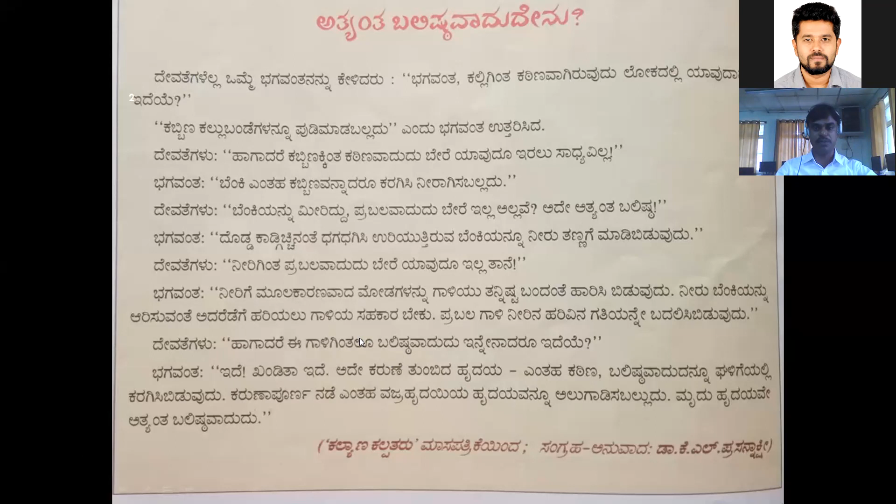For the benefit of students, I will say structure is an arrangement of load resisting elements. Giving a shape to a structure is nothing but structural design. Once we say structure, it has to satisfy some requirements—it may be a functional requirement or a structural requirement.

Structural requirement constitutes stability, which defines the state of equilibrium—the state to resist sliding and overturning. Strength is the capacity to carry loads. Safety is the margin that covers only the uncertainties.

Serviceability normally refers to deflections, which are the end product of loading, so deflection should be well within the limit. Sustainability and durability are more important—the satisfaction of functional and structural requirements throughout the utility period is very, very important.

For the safety of structure, we expect strength to be more than load. Any increase in load decreases the strength. That is why I consider delta S and delta L—plus indicates increase, minus indicates decrease. Variation of load is written as delta L, and variation of strength as delta S. Any increase in load decreases the strength, that is why I have written minus here.

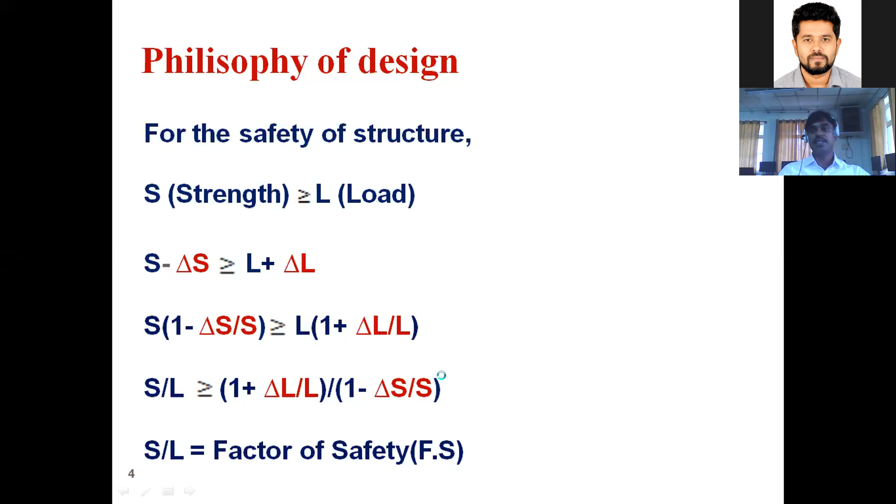Whenever we say height, it is related to buildings only. Whenever we say span, it is related to bridges only.

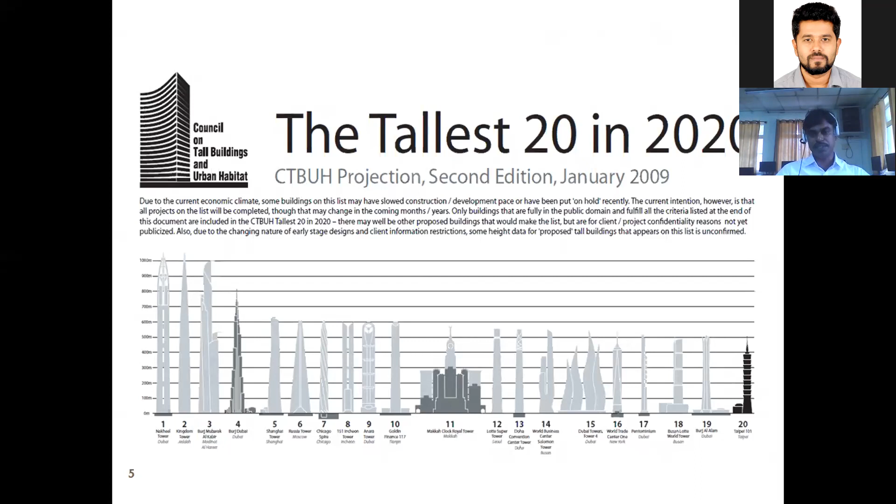There are some definitions when we say high-rise building. The building classification is like this in Indian context: if a building is up to 3 stories, we call it a low-rise building. 3 to 7 stories, we call it a medium-rise building. More than 7 stories, we call it a multi-story building.

According to Emporis standards, a multi-story structure between 35 to 100 meters tall, we call it a high-rise building. Building Code of India says a high-rise building is one with floors 15 meters or more in height, so we call it a high-rise building.

According to fire safety, as per International Conference on Fire Safety, we say there will be impact on height also, so that we have to consider.

According to Massachusetts law, the United States general laws, a high-rise is one having height higher than 70 feet, almost 21 meters. Buildings higher than 100 meters are termed skyscrapers. According to Emporis, buildings 300 meters or higher are termed super tall, and buildings more than 600 meters are termed mega tall.

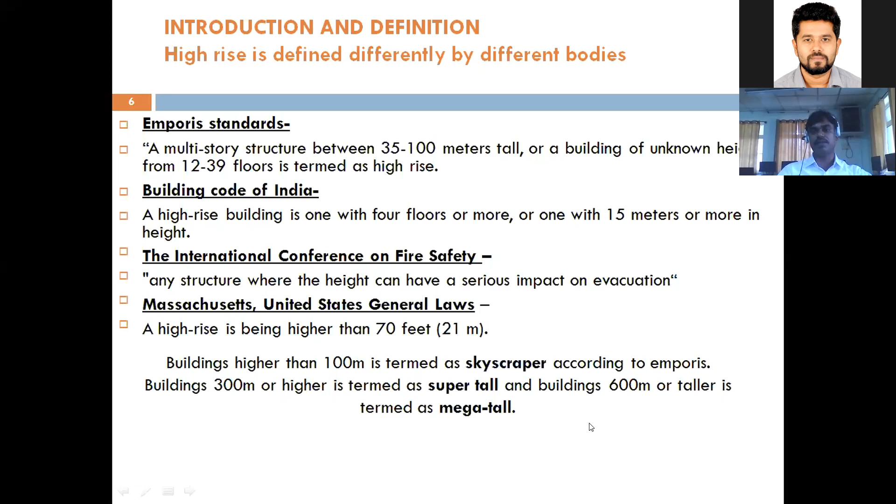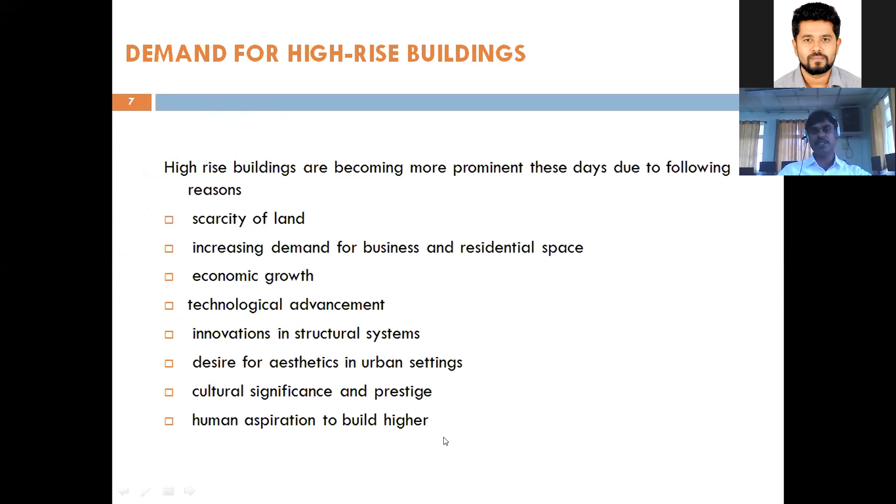So what demands actually push us to go for high-rise buildings? There are some demands. In some nations, there is a scarcity of land, an increasing demand for business and residential space, economic growth, technological advancement, innovations in structural systems, desire for aesthetics in urban settings, cultural significance and prestige, and human aspiration to build higher. These are the demands that drive us toward high-rise buildings.

There are some structural concerns when we talk about high-rise buildings. In reality, all high-rise buildings are subjected to various types of loads depending on their location. Normally these are the loads we expect for a building: snow load, wind load, impact load, blast load, earthquake load, in addition to dead and live loads.

In addition to that, because the buildings are too tall, the building sways due to lateral forces, and that becomes very critical. There's a greater demand on the girders and columns that make up the rigid frame system to carry lateral loads. So we need a rigid frame system to carry the entire load, because the action concerning earthquake load, gravity load, and wind load is somewhat different. So we have to learn a lot.

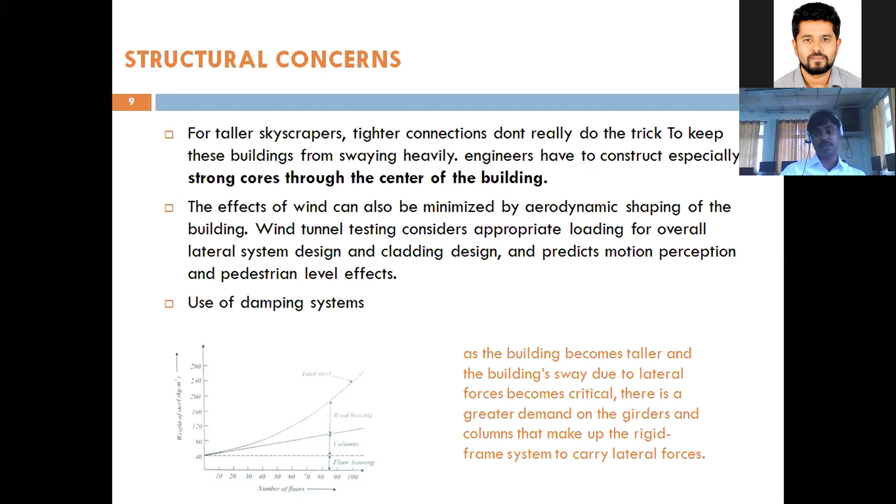There are some case studies we normally observe. If you see the Petronas Towers, it has a tube-in-tube structure. Such a system they adopted is tube-in-tube. The structural members are made with high-strength concrete. The perimeter columns are held together with the help of ring beams. The internal core structure is made up of concrete shear walls. The building did not require an extra damping system because of the heavy structural members made of concrete.

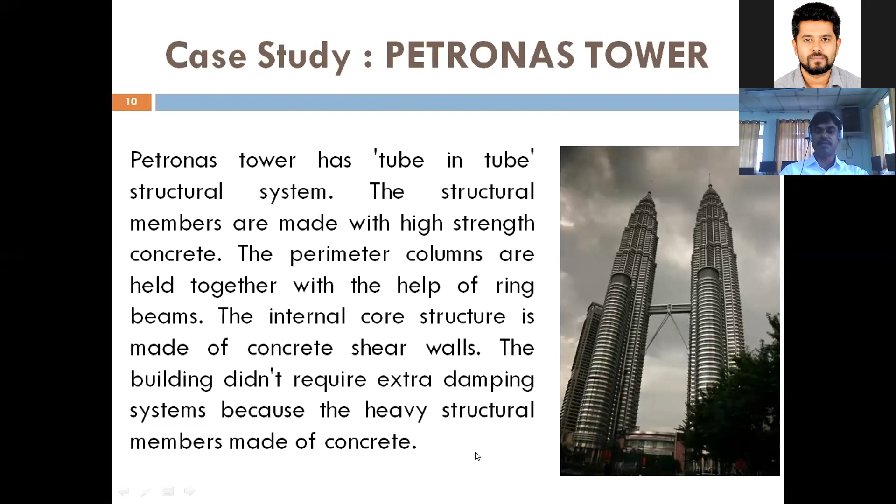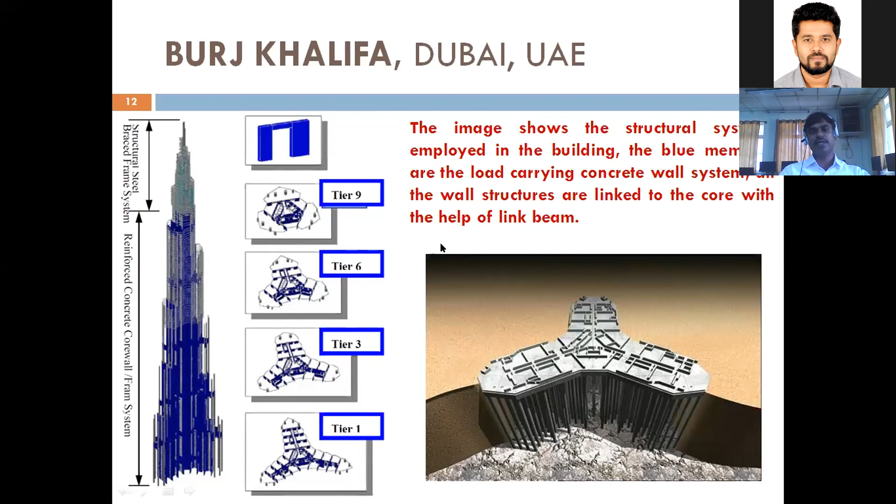There is one more construction building in Abu Dhabi, located nearby a beach. The client wanted to build a skyscraper of circular shape in Abu Dhabi. For that, he exercised a lot.

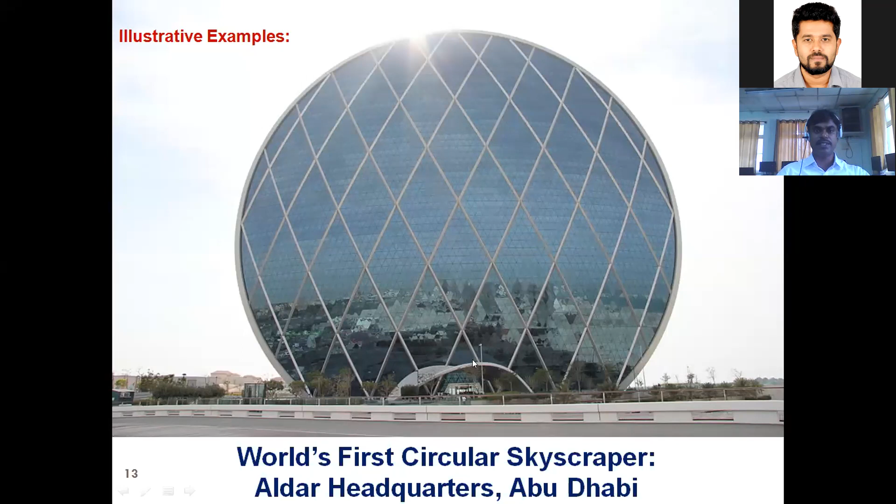This is regarding the world's first tall circular skyscraper, located in Abu Dhabi, called the Aldar Headquarters. This symbolizes the unity, stability, and rationality of the UAE. It took a lot of time to build.

You want to plan this building. The phenomena adopted to build a circular skyscraper in the vertical plane is this: if there's a person simply stretching his legs and a hand in this fashion, and if you join all these points, it becomes a pentagon.

The same idea they have adopted in building high-rise structures - the structural system they adopted is a pentagon type. It is actually the idea they have taken from this technique.

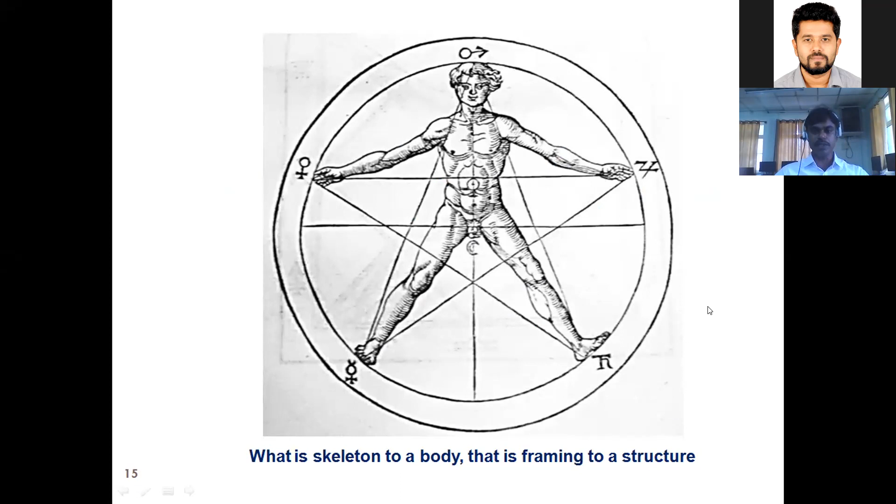There is a story behind Bahubali - not the story of Bahubali directed by Rajamouli, but this statue, this monument. There is one monument in Dharmasthala, which was given shape by an Iyengar in Karkala, and then they moved this statue and erected it in Dharmasthala in a hilly area. To do that, they brought a single monolithic stone. Mr. Iyengar gave shape to Bahubali. Once the Bahubali was ready, they had to travel from Karkala to Dharmasthala, almost 64 kilometers.

This person didn't use a single salt content in the preparation of food, because he would lose concentration. If you use salt content in the preparation of food, you will not get the concentration to do the work. That is why he did not use a single salt content throughout the completion of the work. Once they installed and erected it, only then did he use salt content in food preparation. That was the idea he got, and he completed the work.

Once it was ready, they moved it from Karkala to Dharmasthala, almost 64 kilometers, and the weight of that stone was 170 tons. While transporting that single monolithic stone, the statue of Bahubali, from Karkala to Dharmasthala, it had to cross many bridges, which were not designed for this 170 tons. So they provided additional support and then moved it. They hired a trolley with 64 wheels, driven by 3 tractors of 250 horsepower required.

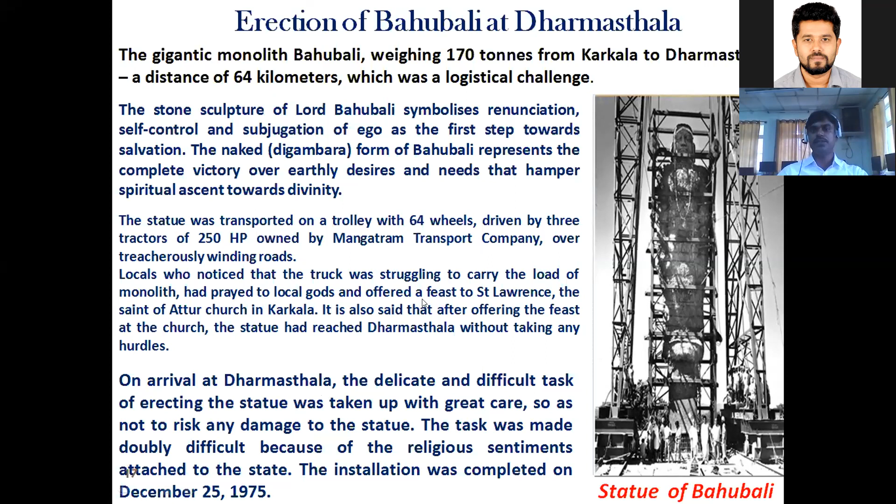So the technique - once they moved from Karkala to Dharmasthala, there were many bridges, and bridges are not designed for this type of loading, so they provided additional support and somehow moved it. Once they reached Dharmasthala, they had to take the statue to a hilly area, which is very difficult for moving a single stone. Somehow, with the help of many techniques, they reached the hilly area and dug a foundation. Once the foundation was ready, they had to make it straight with the help of a crane.

With the help of a crane, they lifted the statue, and they had to justify that the statue was vertically straight. How to justify this? This work was assigned to a professor, a former principal of NIT Surat, Basavarajaya. He read an anatomy book, in which it is very clear there's the ear portion and a knot here called the tarsals. He set a theodolite in front of the statue, and with the help of lifting, he bisected this ear portion as well as this other portion, ensuring the line of action and cross section of both lie in one plane. Only then can we say the statue is justified, standing in the right manner.

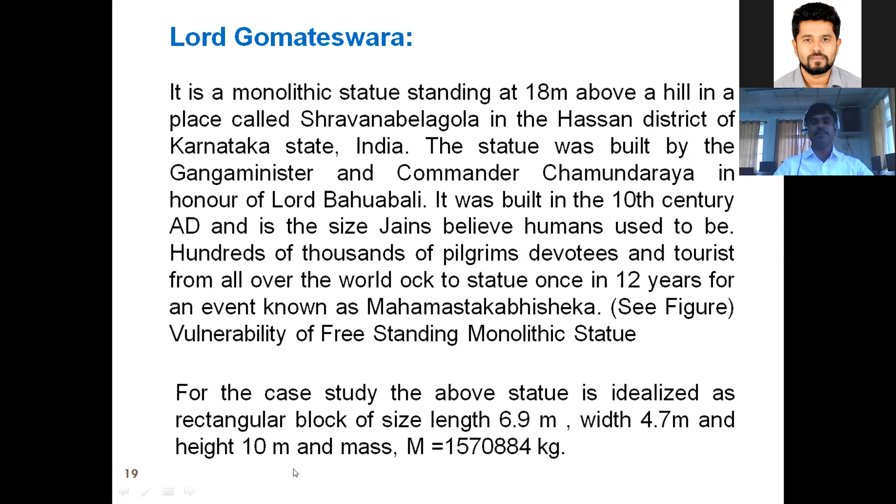I told you regarding Lord Gomateshwara, we also call him Gomateshwara. There is one more Bahubali statue, which we can find in Shravanabelagola. Some similar studies were carried out by Pradeep Kumar Ramacharla of IIIT Hyderabad. This statue is actually 18 meters high, standing at 80 meters elevation in a hilly area. The size is a rectangular block with length 6.9 meters and width 4.7 meters, and the height is 10 meters. The mass of this is almost this much.

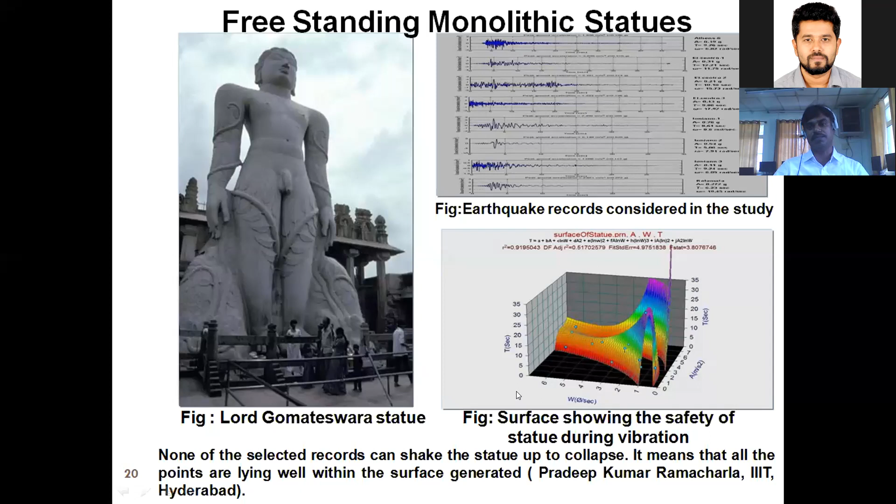It is very interesting for a structural engineer or civil engineer to know loads and forces on buildings, because that is the first qualification. You have to have the idea of loads, and only then can we design or analyze an inspiring structure. The statics of a building deals with its structural stability according to Newton's first law.

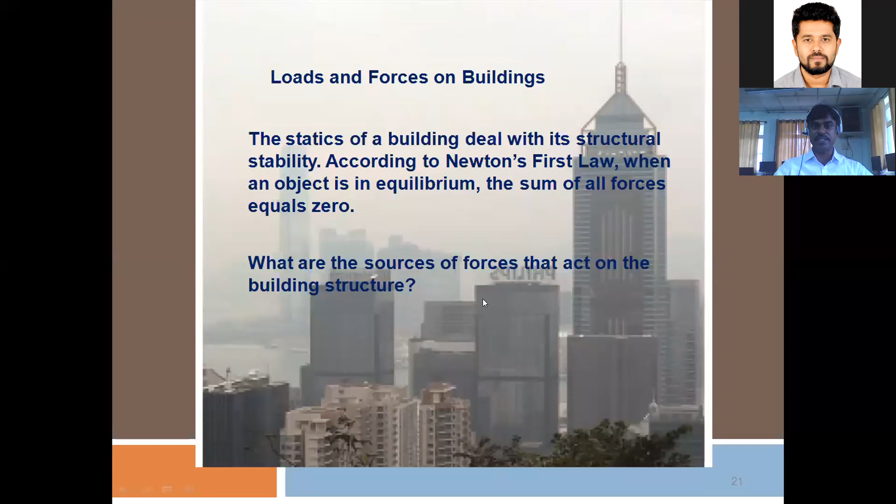When an object is in equilibrium, the sum of all forces equals zero. What are the sources of forces that act on the building structure? These are the various loads: gravity loads, dead loads, live loads, snow loads, lateral loads, wind loads, seismic loads, specific load cases, impact loads, and blast loads.

If you take an example, a tree, wherever you go - India, USA, Pakistan, or any country - the stem of a tree remains circular in section. It grows in a circular manner.

What dictates a tree to grow in a circular fashion? The wind dictates it. When wind hits a tree, it has to take a path, and that is why wind dictates a tree to grow in a circular manner. But the phenomena of earthquake design for a building is different than that of wind load. Earthquake load is an inertia force, so we will see the differences here.

I will discuss loads and load forces. All loads are forces, but all forces are not loads. When a force is acting externally, it is called a load.

Dead load refers to loads that have fixed magnitude and position. Live load refers to loads whose magnitude and position is not fixed. Wind is air in motion. Earth pressure is not much of a problem as compared to dead load and live load. Snow load in Himalayan regions is also not much of a problem. Water pressure is considered mainly in dams.

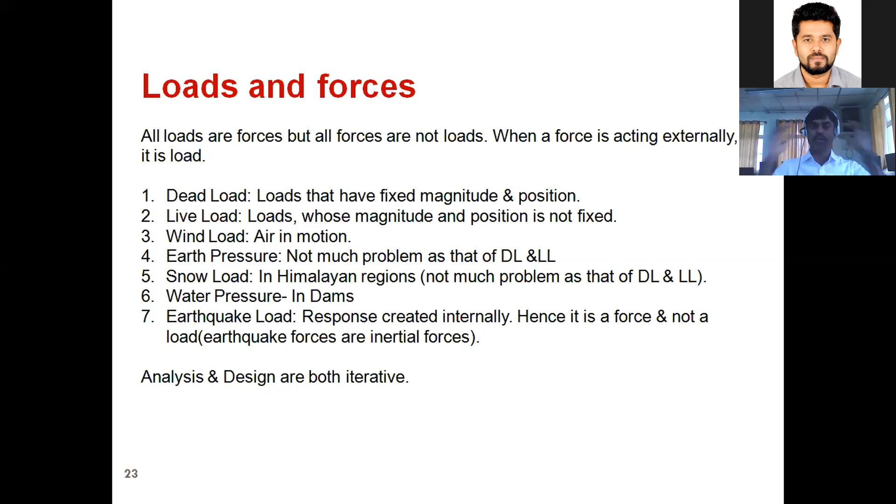Earthquake load is a response usually created internally, hence it is a force, not a load. We make it a load by adopting a code of provisions, which is why the analysis and design are both iterative.

If you compare earthquake load and wind load, wind is actually a pressure type of loading, whereas earthquake load is an inertia force. It is something like you are in a bus without a seat to sit on.

The driver is going at a speed of say 160 or 180 km/h. If the driver suddenly applies the brake, your feet move along with your leg, whereas your upper portion will be thrown back. In the same manner, when a building is subjected to an earthquake load, the base moves along with the acceleration, but the upper portion will be thrown back. That is why it is an inertia force.

Whereas wind load is a pressure type of loading, which is uniform. As the height of the building increases, the wind pressure also increases.

But in case of earthquake load, ductility is more important. So in case of wind load, stiffness plays an important role, whereas for earthquake load, ductility plays an important role.

Apart from ductility and stiffness, damages are also important. In case of wind, if a building has damage, that damage is not at all allowed for a wind case. But in case of earthquake load, damage may be allowed, but ductility plays an important role. Damage consideration becomes very important when you consider a high-rise building.

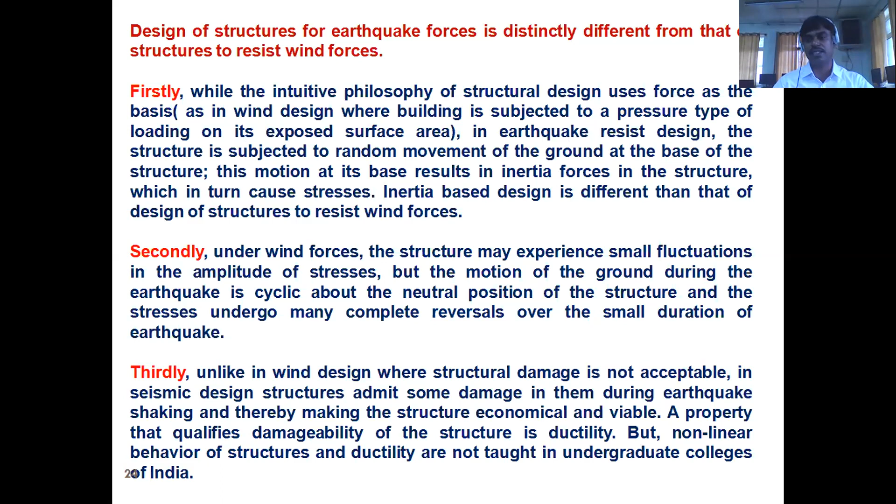So basically wind is a pressure type loading, earthquake load is an inertia type of loading on a building. Both are cyclic in nature, so we call it dynamic load. When the wind is in action, the response is somewhat different than when the earthquake load is in action.

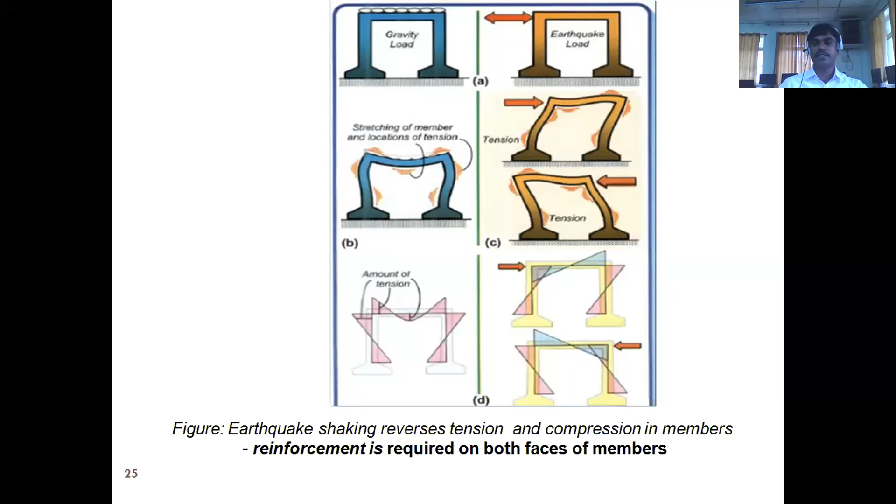That is why, as per seismic design philosophy, as per code of practice, this has been revised now, 2016. Strength and ductility are the main two attributes of a structure to resist earthquake forces efficiently, particularly in severe seismic zones. Two requirements are necessary for a structure designed as per earthquake practice: firstly, strength for which a structure will be designed, and secondly, ductility, which is more important.

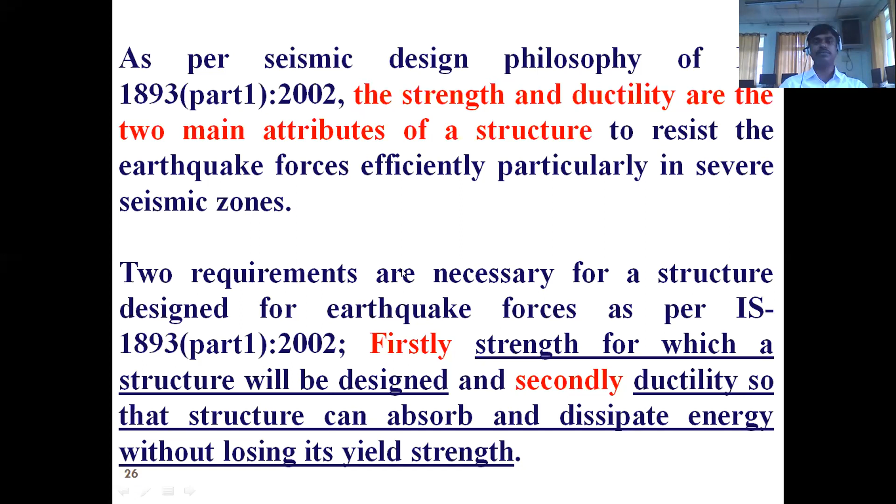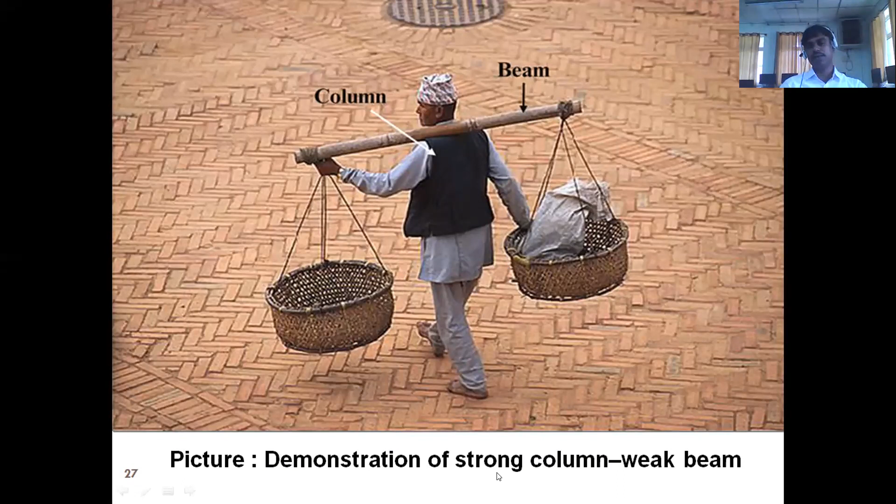That is why in case of earthquake load, we go for strong column and weak beam. So there are some important modifications in code of practice. We consider two levels of earthquake: design basis earthquake and maximum considered earthquake.

An earthquake that can reasonably be expected to occur once during the design life of a structure, we call it design basis earthquake. The most severe earthquake effects considered by the standard, we call it maximum considered earthquake. We have to consider this and design for that.

There are three seismic hazard levels: serviceability earthquake, design basis earthquake, and maximum considered earthquake. In case of serviceability earthquake, there will be a 50% probability of exceedance in 50 years. Return period may be 100 years.

In case of design basis earthquake, there is a 10% probability of exceedance in 50 years, and the return period may be 500 years. In the maximum considered earthquake, there will be a probability of 2% of exceedance in 50 years, and the return period we consider as 2,500 years.

That is why in code of practice, zone factor corresponds to this maximum considered earthquake. The values of Z are evaluated in a deterministic way. It cannot be directly related to the definition we said above. The factor 2 in the denominator of Z is used to reduce the MCE, maximum considered earthquake zone factor, to the factor for DBE, design basis earthquake.

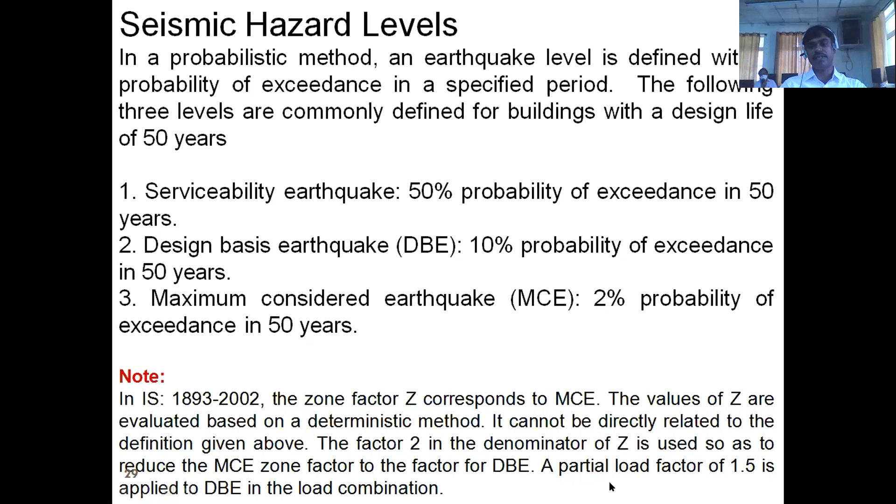So the partial factor, load factor, we have to consider for DBE in the load combination. So the risk can be defined in this fashion.

Risk is always a product of hazard, site effects, and vulnerability. Vulnerability is nothing but analysis of a structure when it is subjected to a hazard, maybe in terms of interstory drifts, stresses, and strains. But risk is nothing but the probability of damages and losses, whereas vulnerability depends on building type.

I told you the analysis in terms of many parameters. It depends on building type and age, population density, land use, and month and time. But soil effects play an important role, so soil amplification is due to soil type and topography.

Whereas the hazard is nothing but the probability of ground motion. This can be estimated, but the hazard cannot be mitigated.

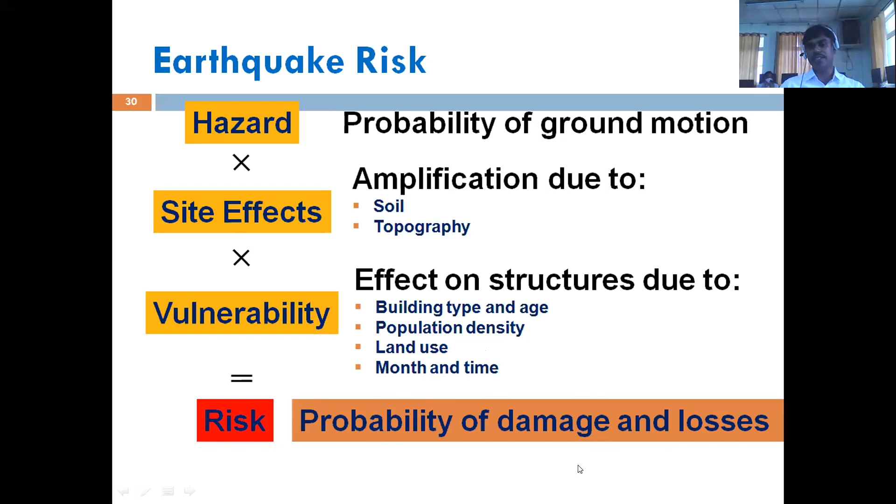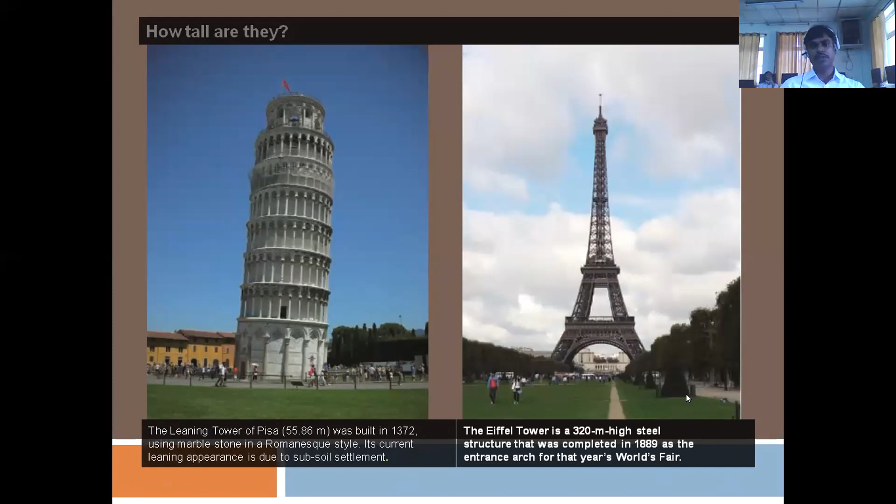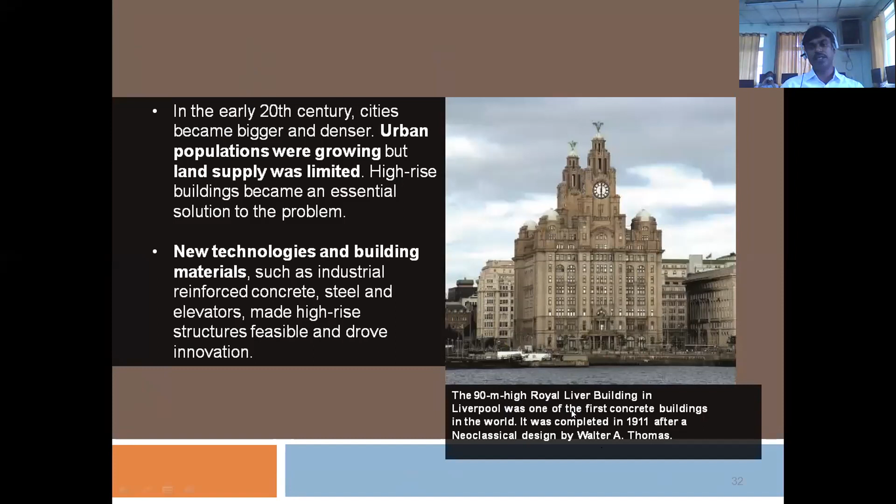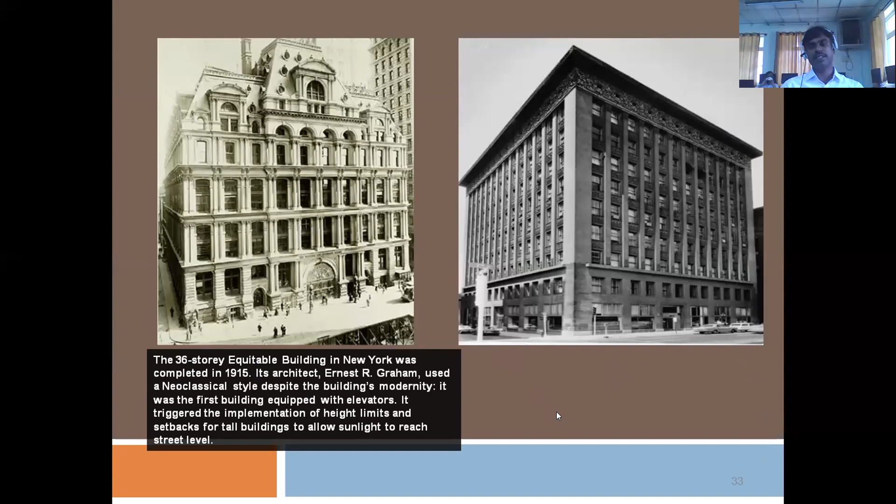So this is one more high-rise building from the early 20th century - it is actually the Royal Liver Building in Liverpool. And there are some other buildings which were built earlier: a 30-story building, a 36-story building, and this is one more building.

So now our interest - do you know these buildings? How tall are they? What are the structures? That is very interesting. So in the future, what may be the height of a building?

That is more interesting for a structural engineer. Whenever we say skyscraper, high-rise, mega tall, super tall, anything, what sort of section is required? Whether we go for a prismatic section, a tapering section, or a varying cross section. Whatever the high-rise building you see in Abu Dhabi or any nation, either they build prismatic type, tapering type, or varying cross section.

If you consider the council, it is officially used to describe if the height is more than 600 meters, or double the height of a supertall, because Burj Khalifa is almost 828 meters. So our interest is to know what parameters are important to build such a high-rise building. So I will take up first the prismatic section.

And then I will take up the tapering section, and last the varying cross section. Our interest is to know, because I told you for the safety of such a structure, we expect more than that load. Generally it is fine. So if the load is more, the strength becomes weak. So strength is more important.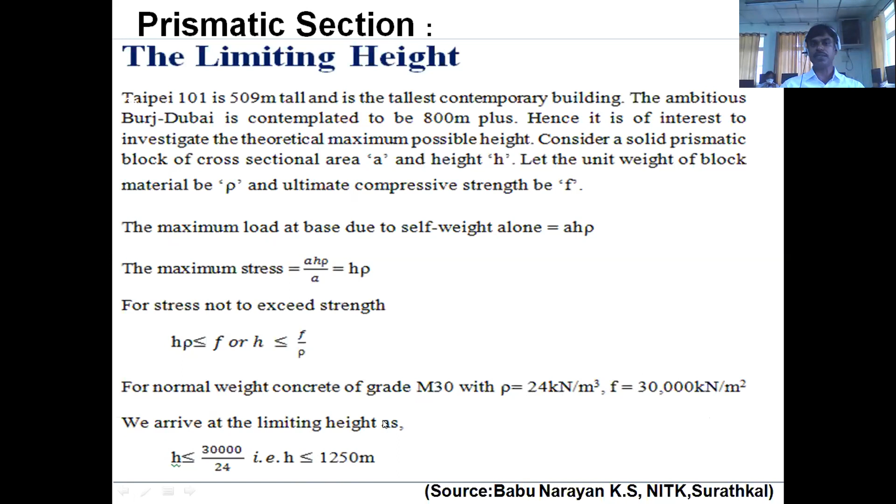If you consider a tapering section, even if the block in question were to be tapering, with area A at the bottom, vanishing to 0 at the top, load usually is 1/3 of H into rho, volume into density. Stress again divided by area is 1/3 into H into rho. For this stress not to exceed strength, 1/3 H into rho should be less than strength. If you adopt the same grade of concrete, you can go up to a height of 3750 meters. Still more, if you are going for a tapering section, we can build a high-rise building up to a height of 3750 meters. What dictates this?

Actually, if you see here, it can be recognized that the maximum achievable height is restricted by the material's strength to weight ratio. To extend the possibility, we need to seek materials with high specific strength to weight ratio. Also, it should be remembered that this limiting height is arrived at for self-weight alone, and if we include some other loads and effects, which are drastically less compared to it.

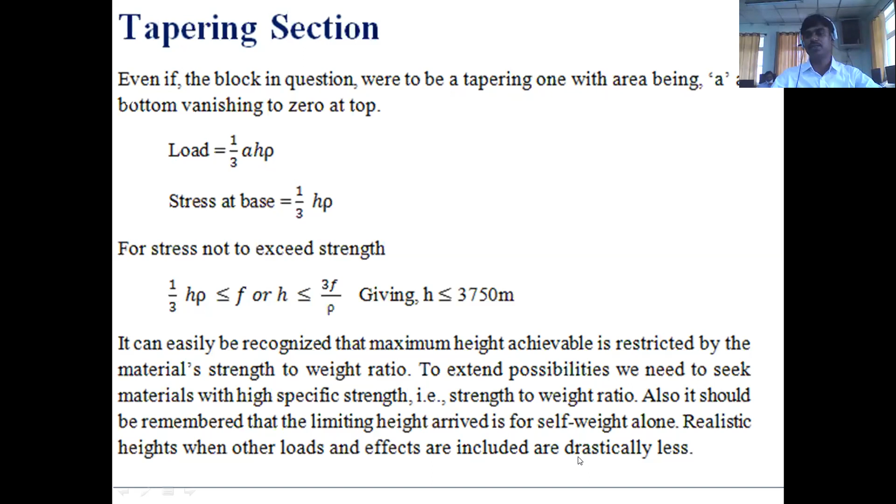Suppose if you consider a varying cross section - some area here, this is the cross section with varying cross section, some area at top and some area at the bottom. Let the cross-sectional area at the top be small a, and at a distance x from the top be A. Say here, from here the bottom is A. The figure shows the forces acting on the slice of thickness dx. I'll consider a small element here, some area, small element, and where is the W?

W is nothing but density, and sigma is the uniform stress. If a varying cross section is subjected to uniform stress, and if you equate these forces acting on an element here, the dA indicates change in area, change in cross section. That's all. So the force is vertically down here. It offers a resistance, that is sigma into A plus dA. This is for an element.

So if you equate all these forces, sigma into A plus dA minus sigma A should be equal to the total load coming, which is W into A into dx. If you separate these variables, this gets cancelled: dA by A should be equal to W into dx by sigma. W is nothing but density here.

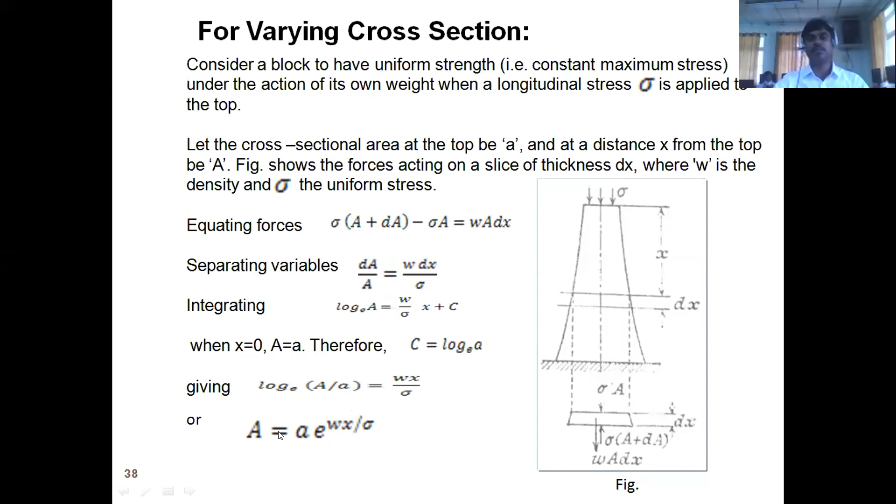Sigma is nothing but uniform stress. If you integrate this expression, it becomes log base E, so log A equal to W divided by sigma into X plus C. When X equal to 0, A is small a. If you put C equal to log A base E, you get this expression: A equals small a times e to the power of Wx divided by sigma, where W is density and sigma is stress. This is the top cross section area, this is the bottom cross section. This is the expression we are taking.

So similarly, our interest is to know that of height also. What will be the span? Because bridges are continuous on many supports, bridges are designed as a continuous beam. It continues on many supports, like a simply supported beam.

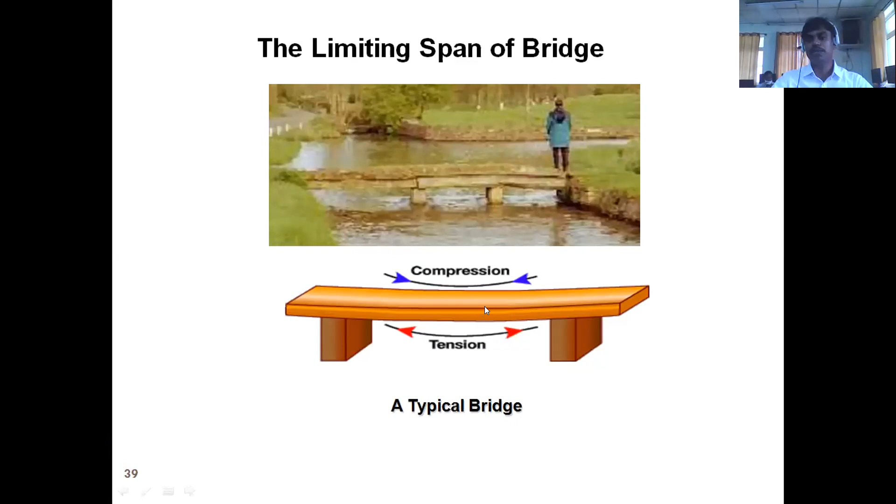If a lady is standing on a man-made bridge, what do you expect? Compression at the top, you can expect tension at the bottom. The behavior is like this.

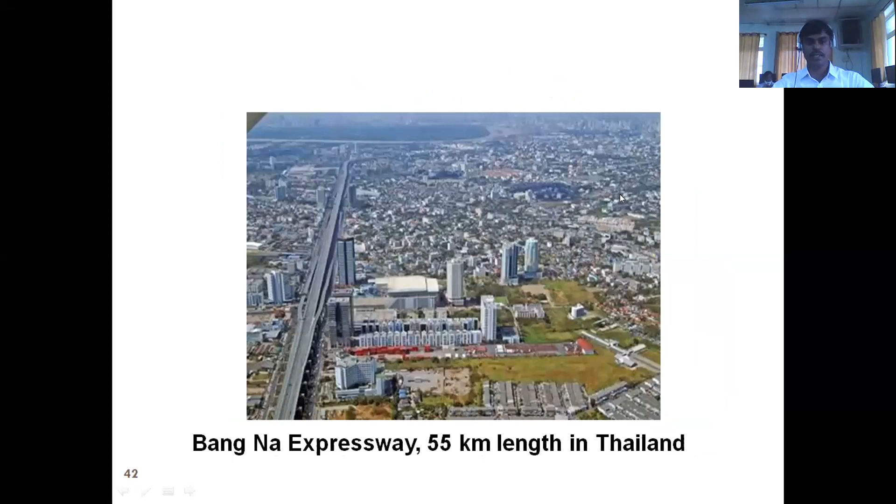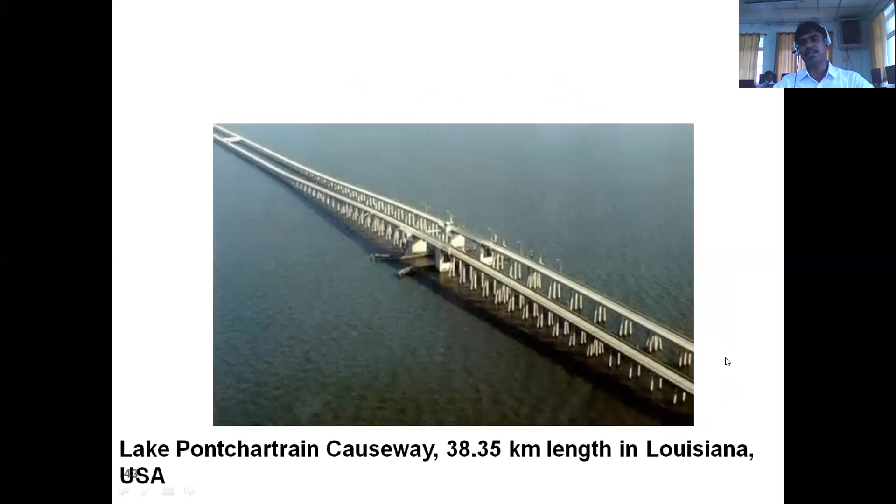So these are some of the longest bridges in the world which we come across. There is one that is actually 164.8 kilometers in length in China. There is one more bridge in China that is 113.7 kilometers in length, that is the Tianjin Grand Bridge. Then Bang Na Expressway, 55 kilometers in length in Thailand. And one more in Louisiana, almost 38.35 kilometers in length. In Louisiana there is one more bridge which is 36.69 kilometers in length.

So what is important to build a bridge of this span? What may be the limiting span? Our interest is to know what may be the limiting span. Let us attempt to determine the theoretical maximum span. Consider a simply supported beam carrying its own weight. Let L be the span, and let B and D be the width and depth of the beam. Let rho, F and tau be the unit weight of the material, ultimate bending strength, and shear strength respectively. And let delta max be the maximum permissible deflection of the beam.

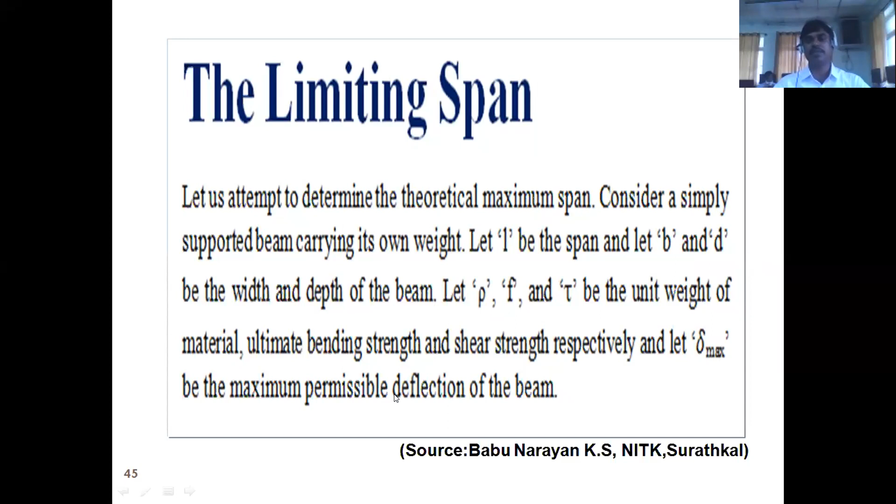Once we say simply supported beam, the structural behavior we can expect is that deflection will be more, there will be shear. So based on all these considerations, first we will consider structural consideration.

For structural stresses to be less than maximum permissible strength: load per meter is BD into rho into density. Maximum moment for a simply supported beam is BD rho into L square, that is WL square by 8. BD into rho is nothing but load, and WL square by 8 is the maximum bending moment of a simply supported beam. Section modulus Z equals BD square by 6 for a rectangular cross section. Maximum bending stress can be expressed as M by Z. Substituting for M and Z, you arrive at 3 by 4 rho L square divided by D.

This is the bending stress due to loading, due to dead load alone. This stress should be less than the maximum strength, so I have to write this should be less than the maximum strength. If you rearrange this, you get the expression L should be less than or equal to root of 4F divided by 3 into rho into D. Here, L is the span, D is the depth of the section. L is directly proportional to the depth. What does it indicate? The equation suggests any span is possible with the right depth. That is what we got from flexural consideration.

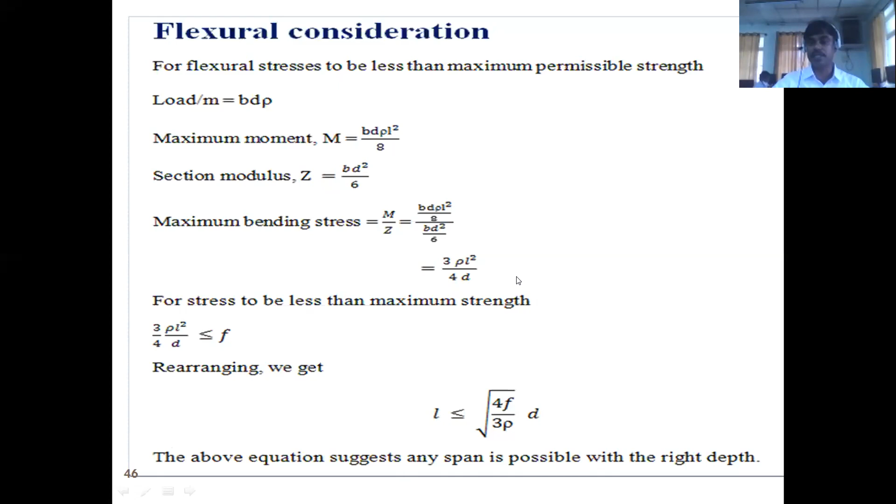What does it indicate? Again, L is directly proportional to D. This expression again suggests that any span can be managed provided the depth is right. That is what the indication is.

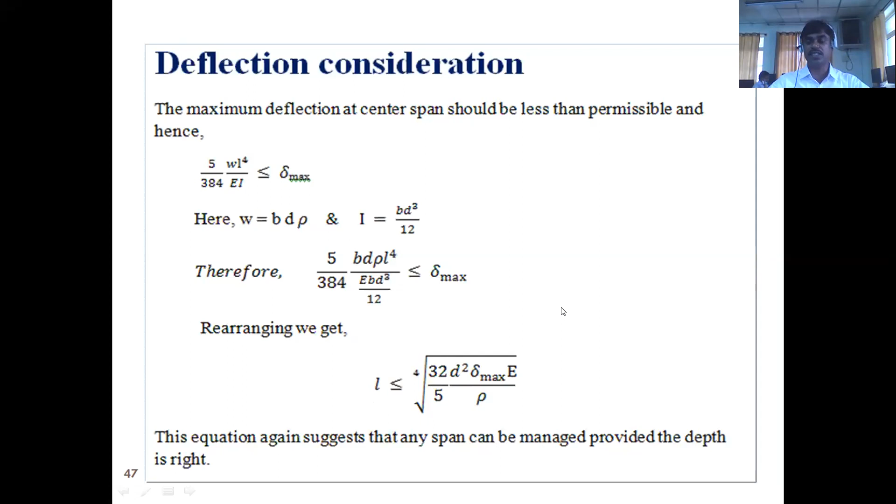If you consider shear consideration, the maximum shear force we can work out. What is the reaction there? Load WL by 2. BD into rho is nothing but WL by 2. Average shear stress, again divided by area, is rho L divided by 2.

For shear stress to be less than shear strength, this should be less than shear strength. If you substitute simply M30 grade of concrete, tau for M30 concrete is 3,500 kilonewton per meter square, and rho is say 25 kilonewton per meter cube. If you substitute here in this expression, L equal to less than equal to 3,500 into 2 divided by 25.

That is, L should be less than equal to 280 meters. What does it indicate? It demonstrates that there's a limit on span and it is dictated by shear consideration, not anything else. So here there's an appreciation of the behavioral aspect, which is very important.

It is redundant to recall that the beam is a wonderful device of the structural engineer that channelizes vertical loads horizontally, and this horizontal load flow is accomplished by shear. It is but natural that this phenomenon should dictate the possible limits. So this dictates the possible limits.

Yet again, we come to the inescapable conclusion that to extend limiting possibilities, we should search for materials with high strength. That is why it is the capability of an engineer to produce as high strength as possible. Earlier, maybe in 1950, the definition of concrete was a composite mixture of cement, fine aggregate, and coarse aggregate. Now the definition of concrete is not so. We use many mineral admixtures, chemical admixtures to produce high strength concrete as possible. That is why strength plays an important role, as you can see even in an expression.

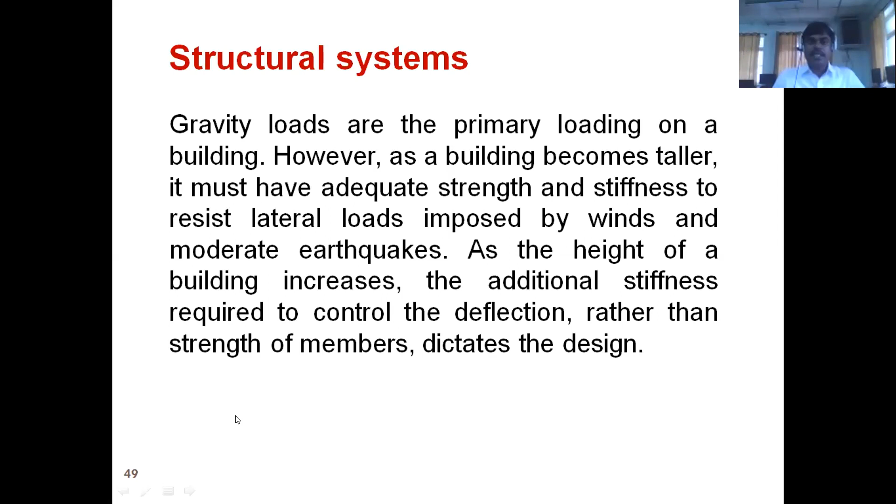The concept of going for a high-rise building and its structural system was suggested by a popular man in structural engineering called Fazlur Rahman Khan. He introduced this structural system to the entire community of structural engineering. The structural system of a high-rise building is designed to cope with vertical gravity loads as well as lateral loads caused by wind or seismic activity. The structural system consists only of the members designed to carry the load, and all other members are referred to as non-structural systems. So we have to have guidance to design structural and non-structural systems.

In some cases, claddings and other elements are used, even to reduce drift, so we have to go for claddings and non-structural systems also. A classification for such a system of high-rise buildings was introduced in 1969 by Fazlur Rahman Khan.

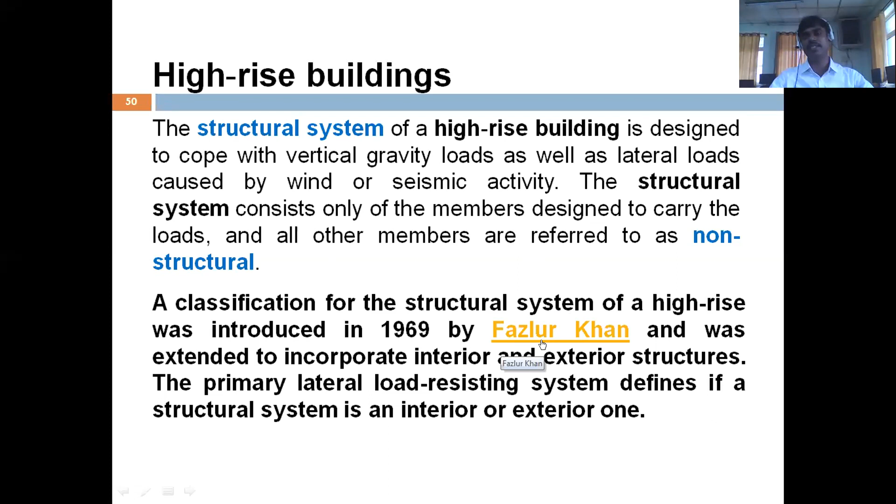We have to salute him. He was a poor Muslim belonging to Bangladesh, studied in India at the Bengal Engineering College, and then moved to the USA to do his MS and PhD. There he completed his studies and became popular, but at the age of 52 or 53, he dies. He achieves everything, and at an early age he dies.

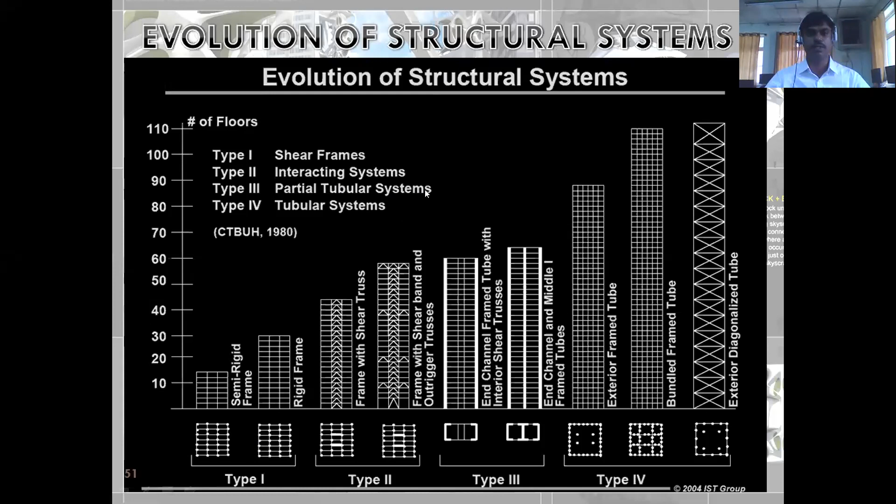So the evolution of such systems goes this way. We call them type 1, type 2, type 3, and type 4, depending on the number of floors. If the floor count is restricted to a certain range, a semi-rigid frame system is enough. This is actually the evolution, and it is better to adopt this type of structural system depending on the number of floors. Again, for steel structural systems and the number of stories, this gives a rough idea for structural engineers to adopt the structural system, especially for steel structures. If it is less than 30 stories, a rigid frame is enough.

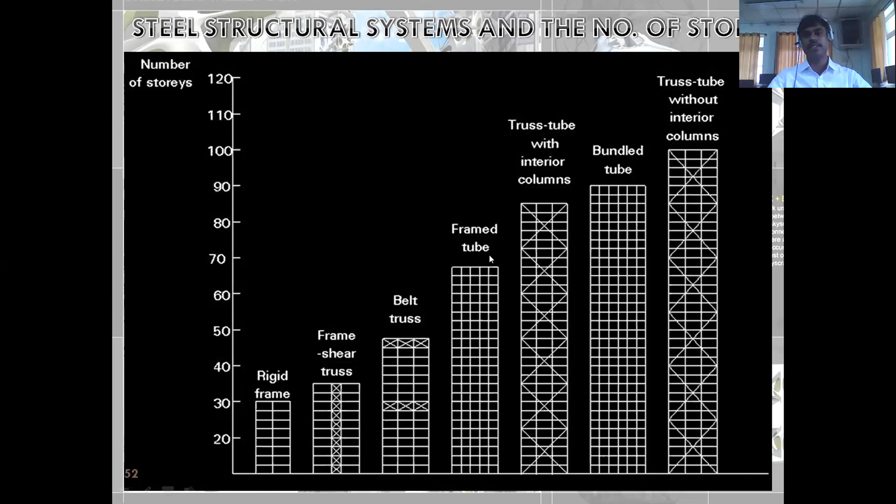There are various types of core systems, especially these core systems: tube in tube, shear wall frame system, shearing frame system, ordinary moment resistive frame system, and many more types depending on the situation and location, everything plays an important role. So types of tubular systems you can see here.

These are the types of tubular systems we normally adopt in case of high-rise buildings: framed tube, perforated type, deep spandrel type, and truss like a bundle type.

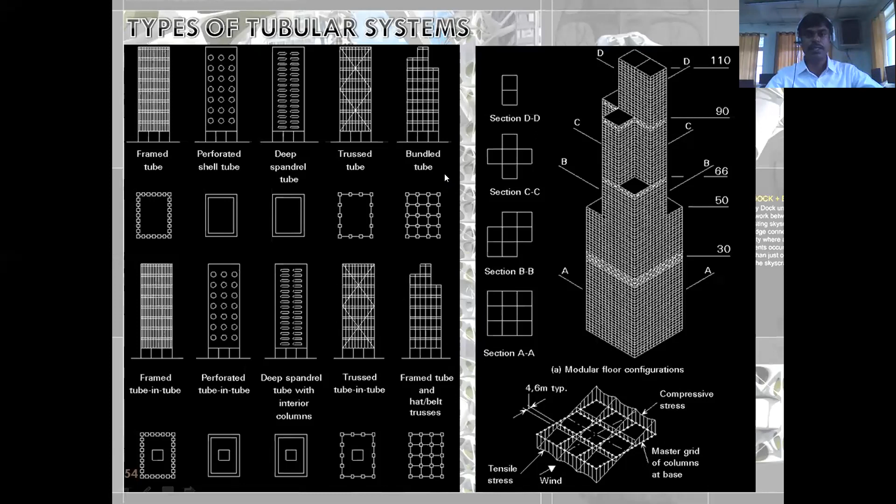There are some examples of steel systems adopted for case studies. For HSBC Bank, they adopted a suspended system. Bank of China adopted a composite frame system. Petronas Tower adopted a tube-in-tube system, a concept given by the popular professor Fazlur Rahman Khan. Similarly, for the World Trade Center, a tube with core system was used.

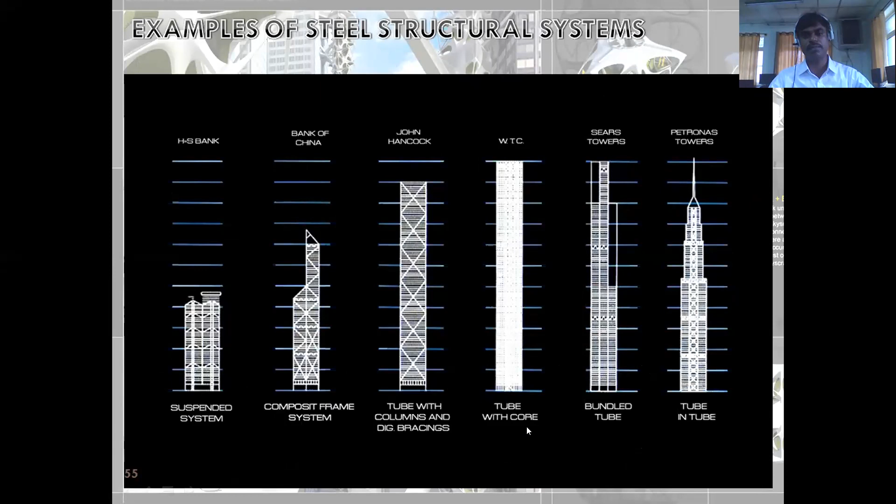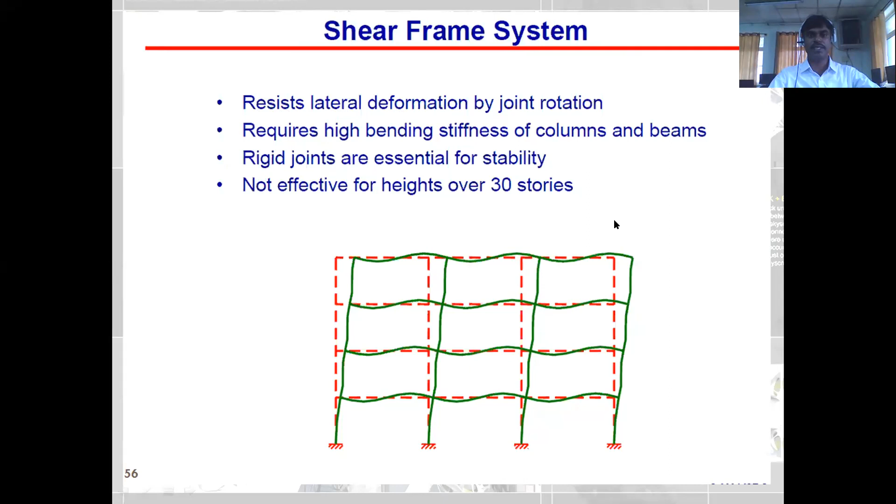In case of shear frame system, lateral loads resist lateral deformation by joint rotation, which requires high bending stiffness of columns and beams. Rigid joints are essential for stability, but this is not effective for heights over 30 stories.

In case of brace frame system, lateral forces are resisted by axial actions of bracings and columns. Steel bracing members are filled in the bay, making it more efficient than a rigid frame. This includes cantilever type, shear type, and combined type.

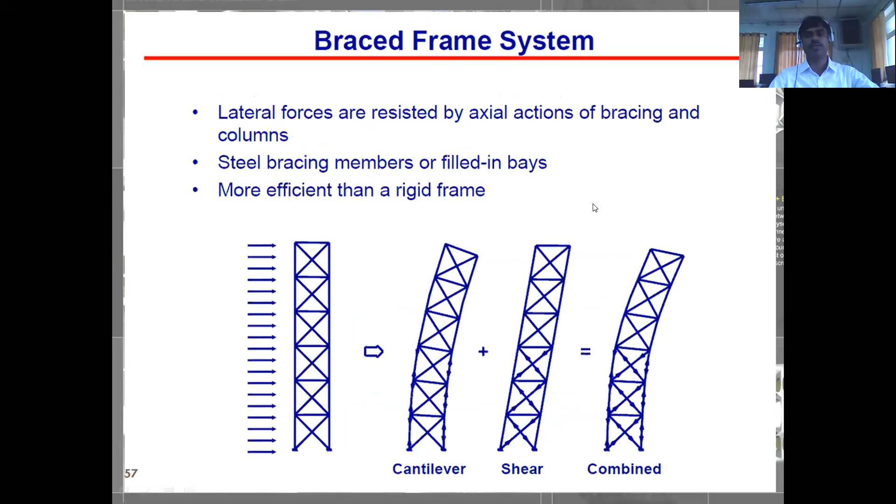For an outrigger brace system, a one to two story deep truss connects the core to perimeter columns, increasing the bending rigidity. You can see the outriggers here, and there is a braced core, depending on the rigid core for shear. This is for shear resistance, where compression is on one side and tension on the other, which we have to account for.

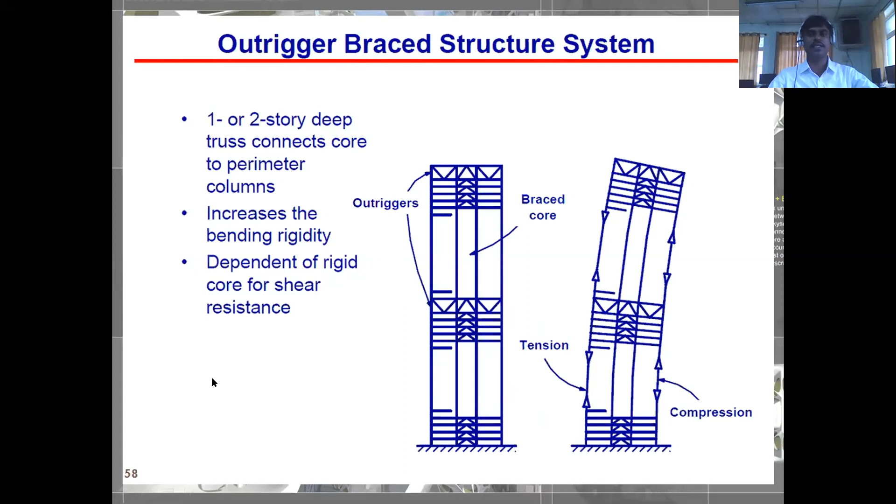The windward side and the leeward side play an important role. Such a system is designed accordingly.

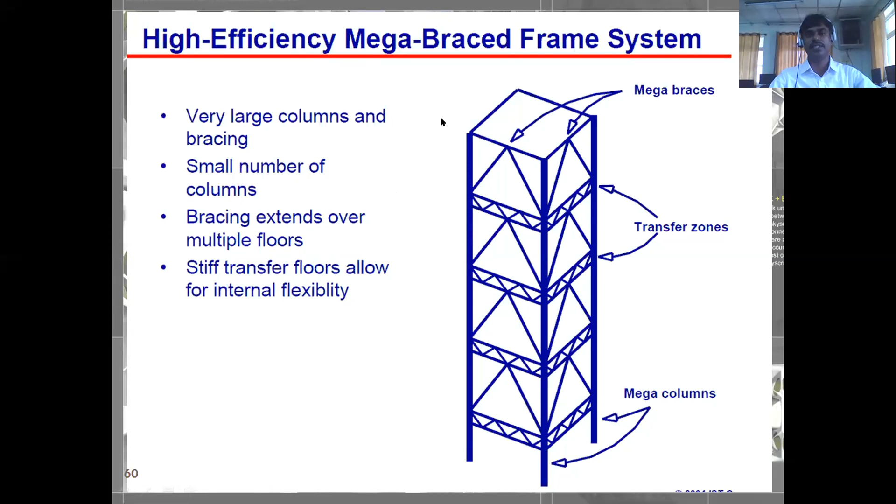In case of the belt truss system, this was adopted in China for the Shanghai Tower. This is the core truss, and this is the mega structure. You can see the outrigger truss here; this is the technique they adopted.

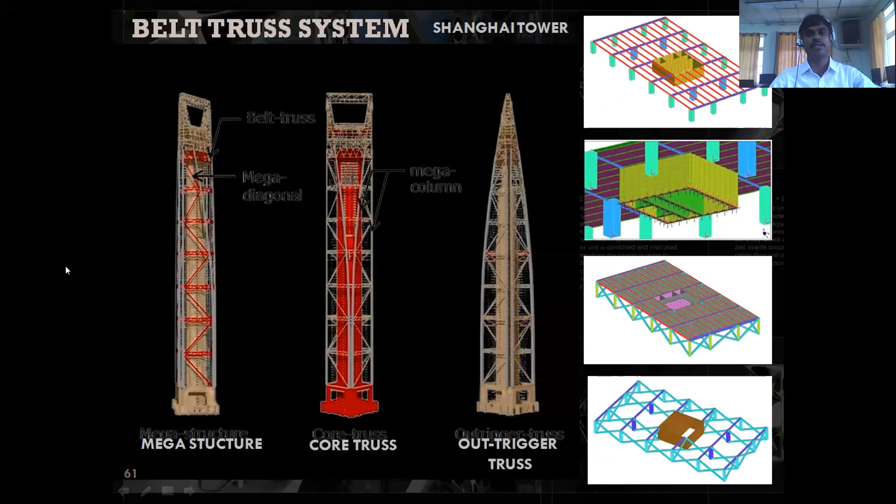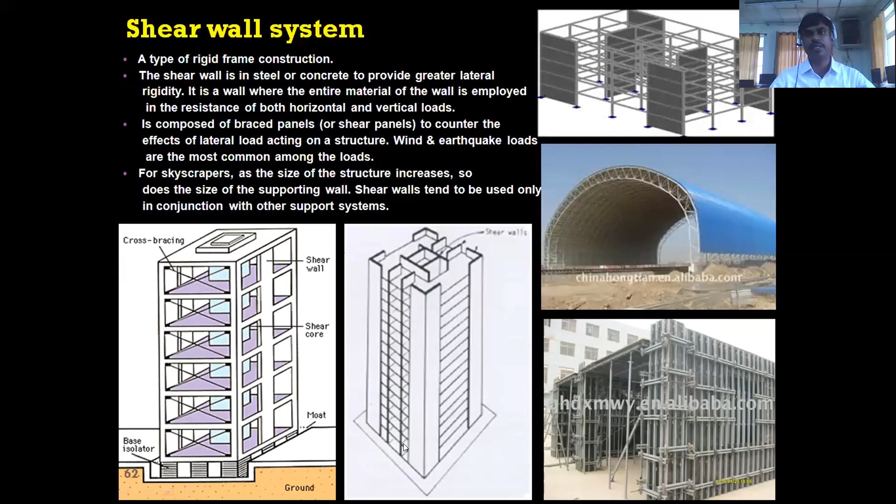For the shear wall frame system, symmetry plays an important role and must be made use of. This should be adopted depending on the location; if it is a seismically prone area, it is better to go for a shear wall frame system.

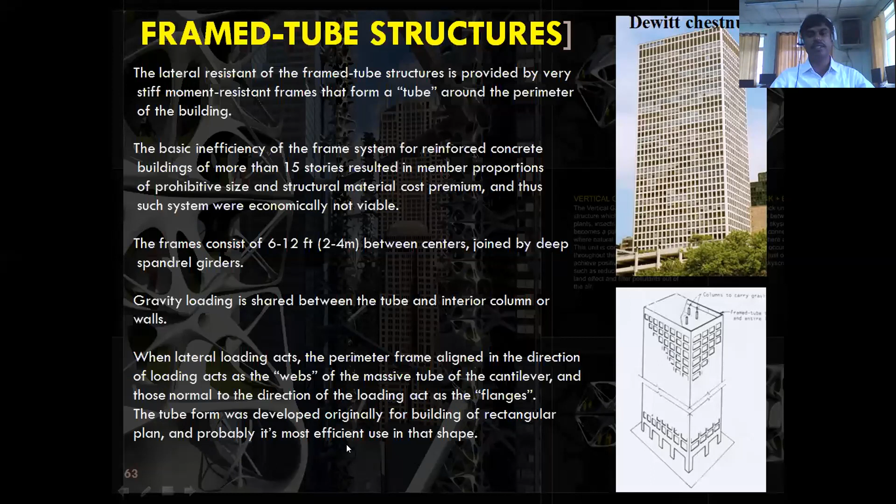For the truss tube, cladding with the truss tube is more important; you can control drift and other factors if you go for cladding. Recently, the use of perimeter diagonals, the diagrid type, has become convenient for such efficiency depending on the situation.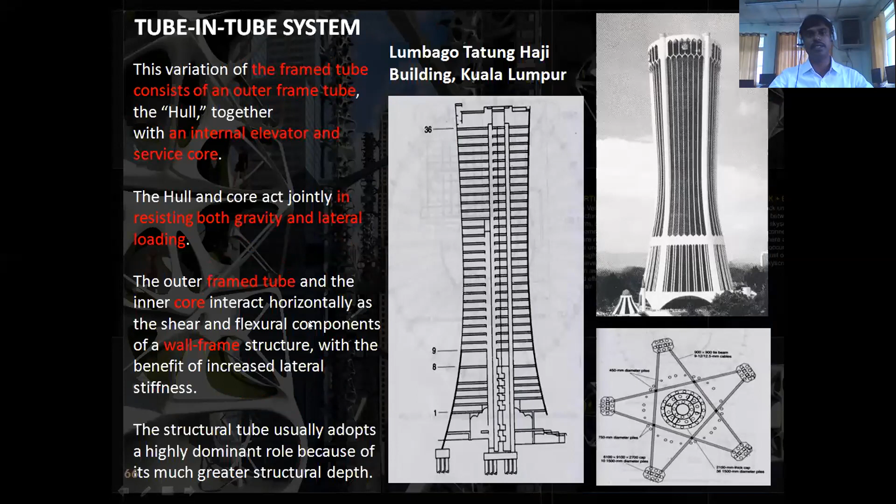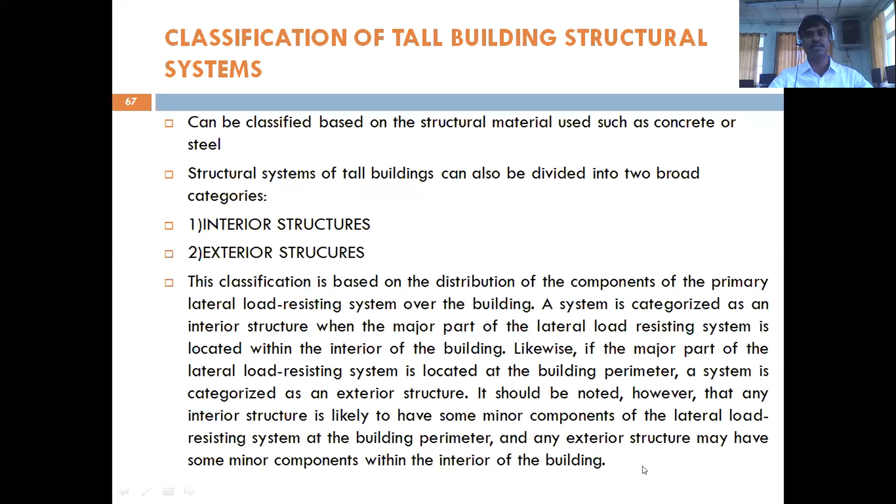Again, a classification of tall buildings depending on structural system. We call exterior structures and interior structures. Interior structures are of this type, exterior structures are this type. In the interior structure system, we treat rigid frame as the interior system, shear wall structure as the interior system. It can build up to 20 to 30, say 25 floors.

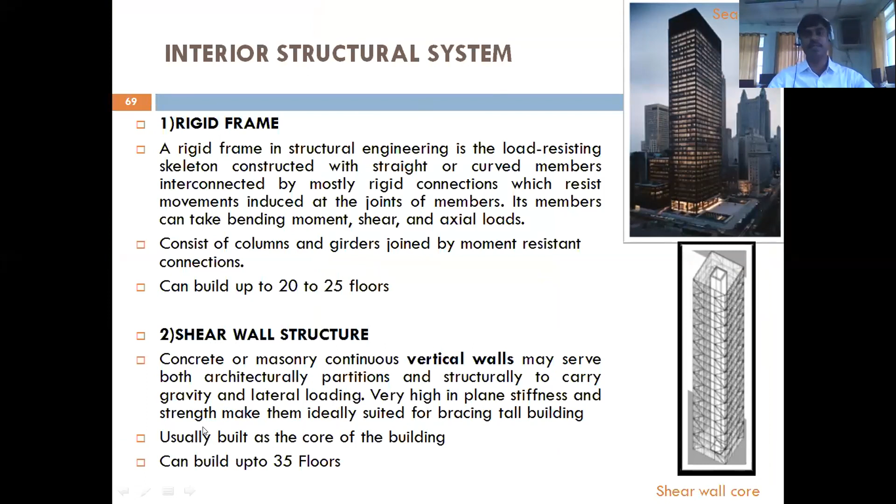This is better, I can build up to 35 floors. Concrete or masonry continuous vertical walls may serve both architecturally, so like that. The outrigger system is also an interior system. The outrigger system was adopted for the Shanghai World Financial Center in China.

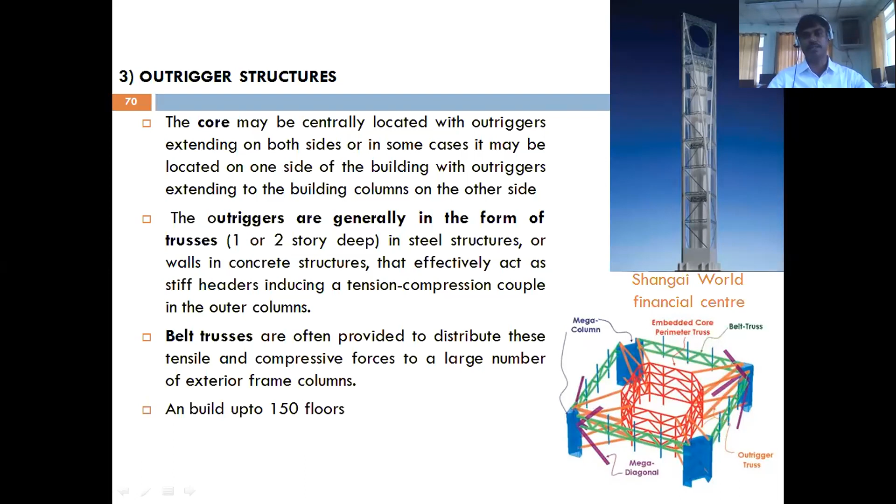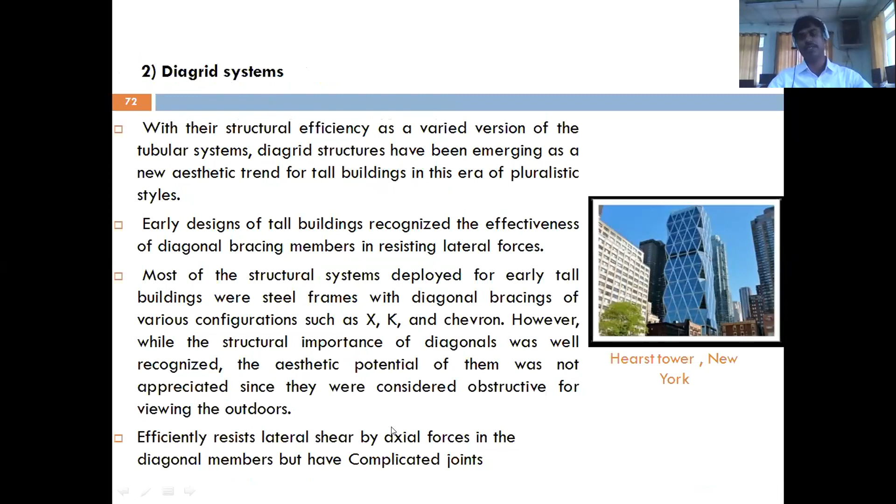In case of exterior structures, they use tube systems: framed tube, braced tube, bundled tube, and tube in tube are better if you go for exterior. Again, in the diagrid system, this is also best if the building height is tall, super tall, or mega tall.

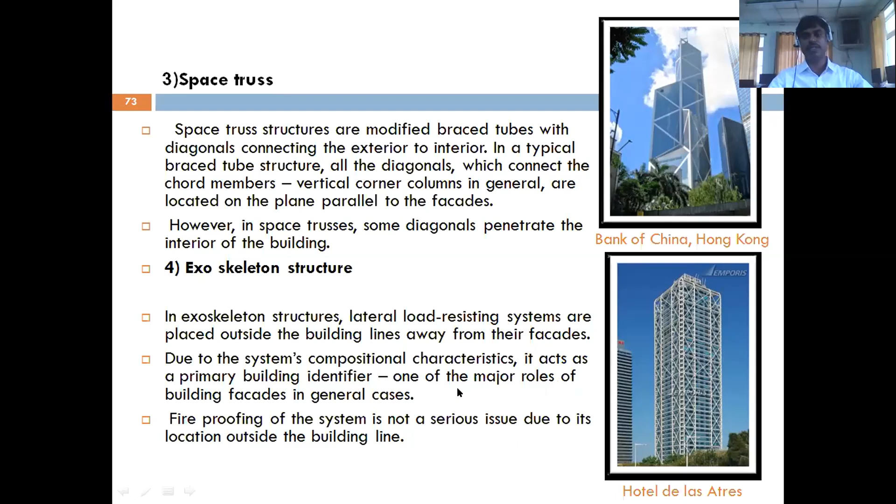For space truss, you can also adopt exoskeleton structures like that. This was adopted by the Bank of China, Hong Kong. This was adopted for one hotel. Super frame structures of this type, at various levels, for a particular level - this super frame structure is a combination of all systems, which is enough.

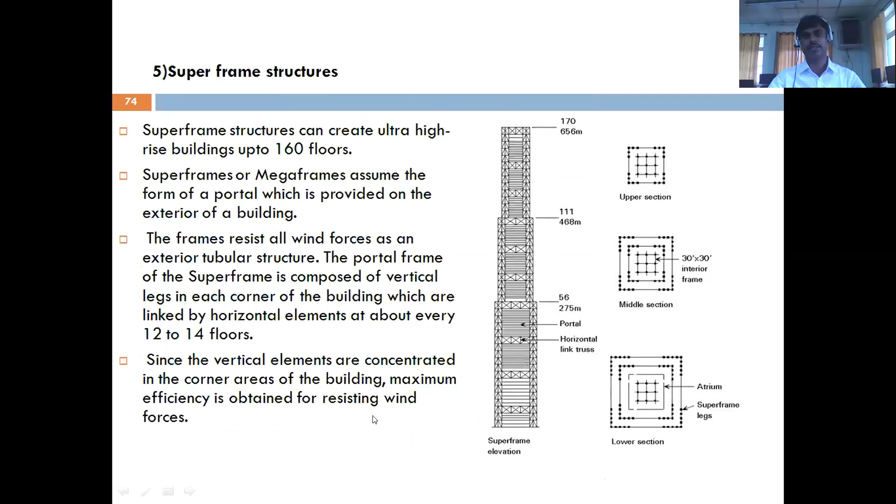Apart from this, uncertainty is one of the biggest problems in structural engineering. We need to address this because the cube strength, the modulus of rupture, Young's modulus, and the properties of concrete that are generally required in design vary. The variation is due to many reasons: variation in quality of material, variation in weight, variation in mix proportions, variation in transporting method, variation in placing of concrete, variation in methods of curing, variation in testing.

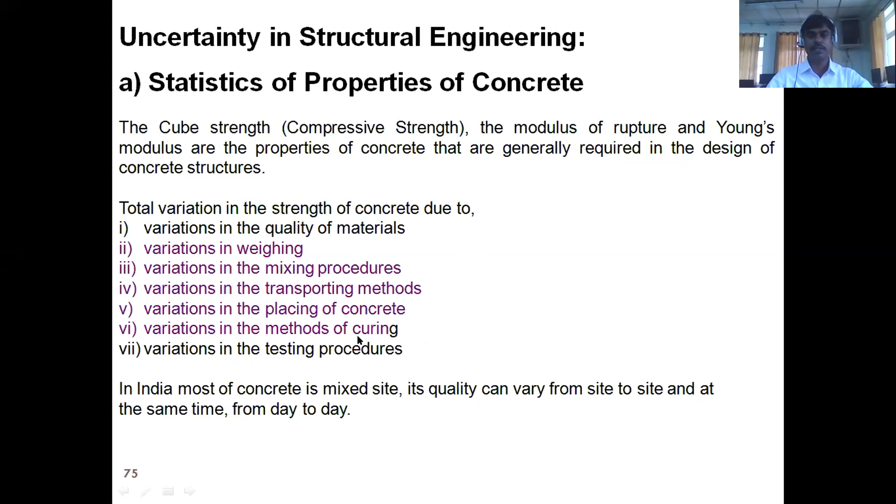How to adopt for variation, how to address uncertainty in structures, is one of the biggest challenges now. Even the property of concrete itself is random in nature, and load is also random in nature. So it is probability - how to handle the probability, how to bring probability into analysis and design, is the biggest challenge here. Even the statistical properties of steel, the ultimate tensile strength of steel, we also treat as uncertainty, as random variation.

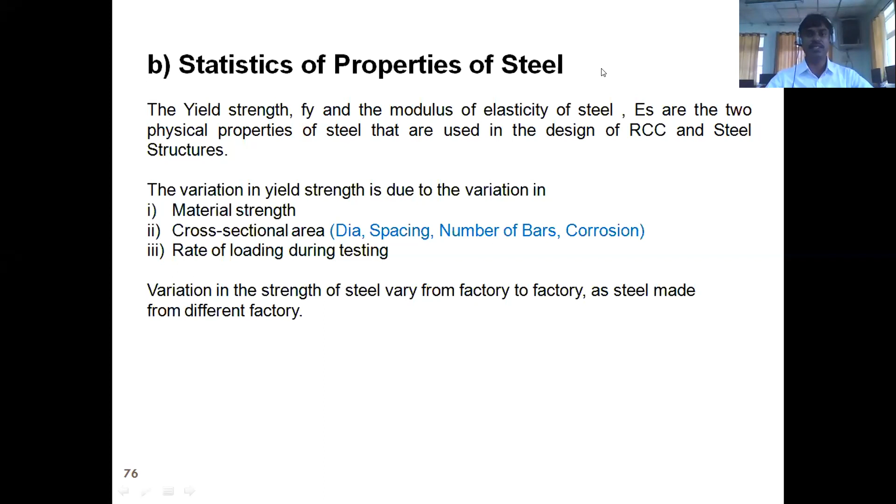There is variation because no brand will provide the same strength. When you compare brand-wise, one brand gives some strength, another brand gives a different strength. That is due to cross-sectional area, rate of loading during testing - the variations are due to many reasons. So variation has to be addressed, and there will even be constructional variation.

There is uncertainty in analysis, uncertainty in modeling - everything we need to encounter. If you look at various grades of steel, there will be variation in the materials and their properties. How to address this? Nowadays, to obtain the dynamic properties of a building, whether high-rise, medium-rise, or low-rise, it is better to adopt nonlinear static analysis.

You can easily get the dynamic properties of the building - frequency, time period, and motions - easily. This is the first fundamental mode through which we can push a building till collapse. This is the structural nonlinearity, because when a building is subjected to loading, a combination of loads, it is no longer elastic in nature, it is inelastic in nature. How do we design a building for inelastic behavior?

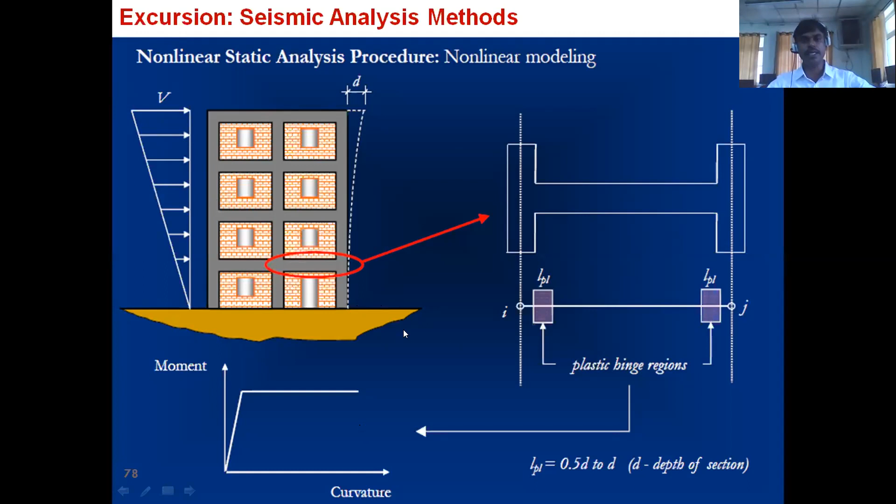So performance-based concepts come into picture. We need to define the properties of everything, and then we have to push the building. This is a simple G plus 3-story building, a 4-story building. When you push a building till collapse like this, the first hinge is formed here. You can see here - go on pushing the building.

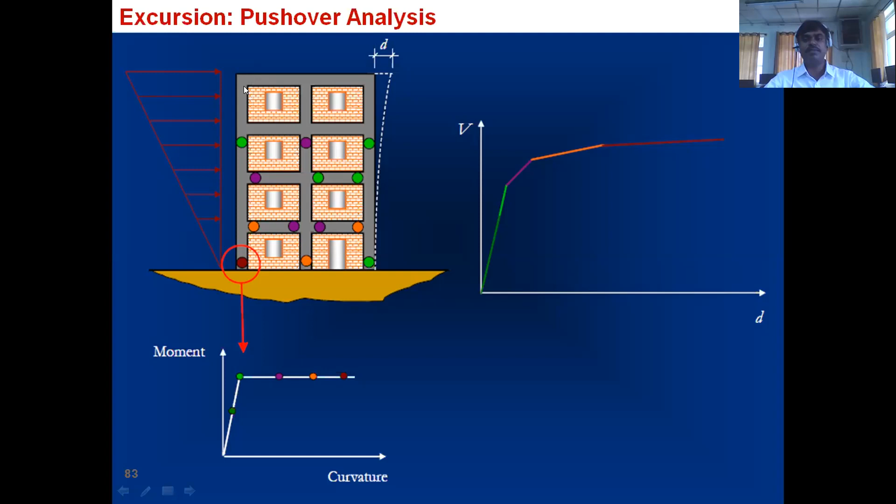One more hinge is formed. Later it enters the inelastic zone, like this - you can see the nonlinear behavior. The capture of these hinges - where exactly the first hinge forms, where the second hinge forms, where the third hinge forms - is very difficult to predict in such an analysis. There is a lot of scope here to do research on this, and eventually it has to collapse. Collapse will occur only when the last hinge is formed, instability occurs, and then total collapse occurs.

This is the load deformation curve for that. Initially it behaves elastically, then elastoplastically, and fully plastically - this is the strain hardening zone. If it behaves like this when subjected to any type of loading, you can easily occupy the building. Even in this zone, life safety is maintained. But if the behavior is like this, you are not supposed to occupy that building.

There's a clear difference between repair, restoration, rehabilitation, and retrofitting. Repair is nothing but a cosmetic touch-up. Restoration is an action taken to restore a structural element. Retrofit means improving the system performance or behavior. Rehabilitation is a master umbrella which includes everything: repair, restoration, retrofitting, and cosmetic touch-up also.

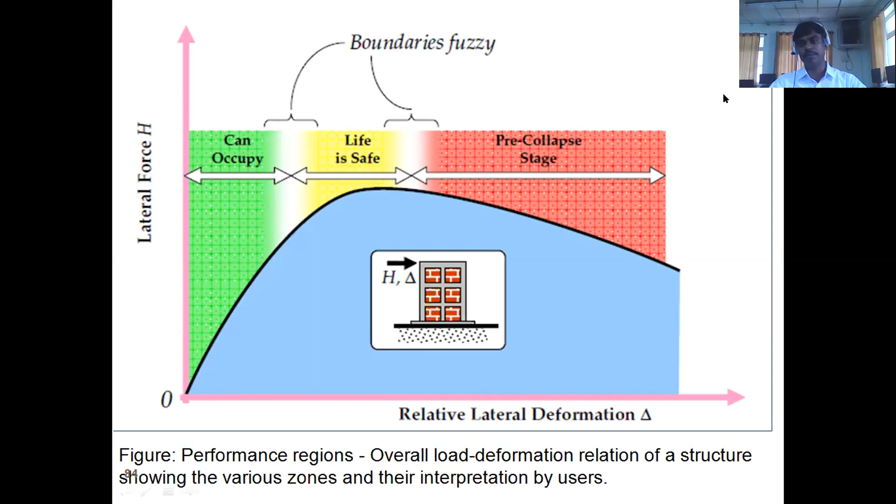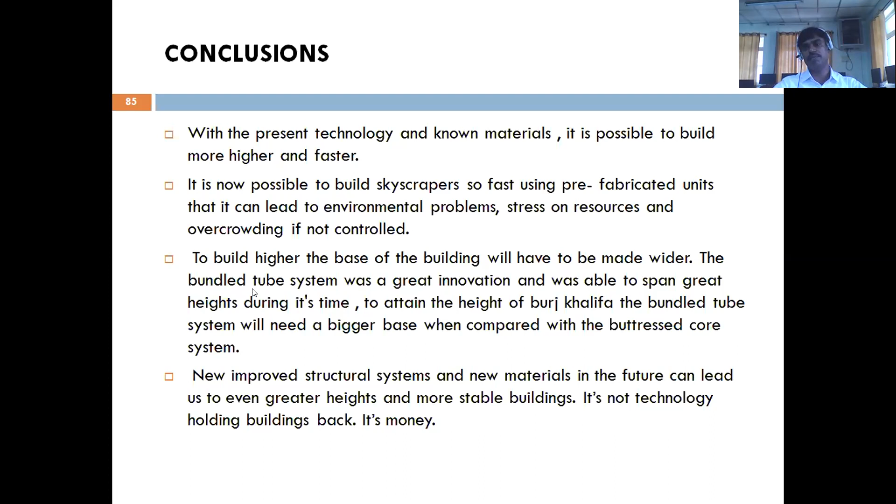For that, we need knowledge of materials and material behavior. Overall, the objective of such an engineer is to achieve as much strength as possible, and the capability to build as high as possible with the advantage of that strength. With such a system, you can build high-rise, mega tall, super tall buildings. How to achieve those strengths is very important. You need to adopt many materials, and a combination of such systems works out very well for skyscrapers.

So that is what I wanted to say in this webinar. If you have any questions or queries, just ask me, I'm in a position to answer.

Thank you, Dr. CM Ravi Kumar, it was really a wonderful session. You have covered a lot of topics in detail: structural framing, limiting height and limiting span of structure, and also plastic hinge formation mechanism. It was really a wonderful session. Thank you once again, Dr. Ravi Kumar. Thank you, Rahul.